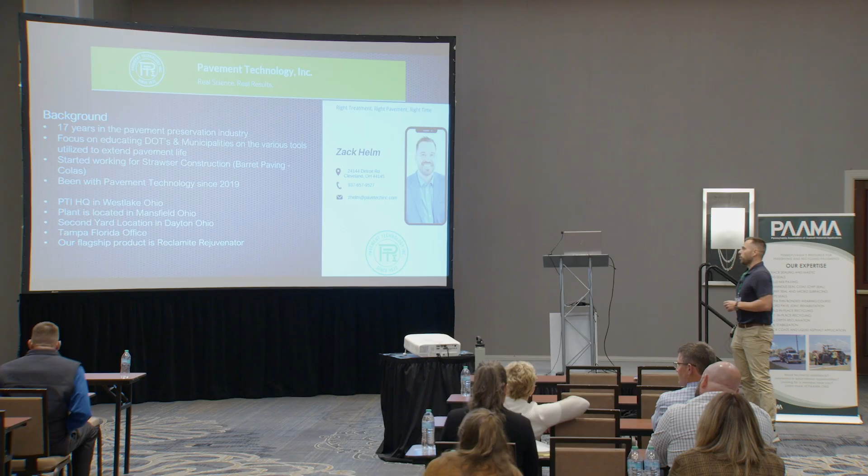Just a little bit about my background, 17 years in the pavement preservation industry. Focused a lot on DOTs, municipalities, on various tools to help extend pavement life. I used to work for Strawser Construction, a Colas company. Worked a lot in microsurfacing, cape seals, fiber mat, fog seals, you name it. Mike, actually, when I left, I said, Mike, you need to come on board, and you took my air. You were my best customer at Strawser Construction. And so Mike came on, and is an excellent person to take over the role. I've worked with Pavement Technology since 2019, where we specialize in asphalt rejuvenation.

That's all we do. A little bit of a quick story. I've been in pavement preservation - I tell people, yeah, 17 years, but really since I was 2. My dad grew up on the back of a microsurfacing machine, and he's also been with Pavement Technology for 45 years. And I can remember some stories.

I have a twin sister, and my sister and I would fight all the time, nonstop. We just didn't get along sometimes. And my dad would say, all right, son, you're going to work with me. We're going to give mom a break, and you're coming to work with me. So my dad would take me to customer visits all the time, and they'd go meet at McDonald's. They'd exchange a sandwich and a coffee, and next thing I know, they're doing a deal on Reclamite or pavement. I was like, is that all it takes? It's just a hamburger and a coffee, and then all of a sudden they're buying the product.

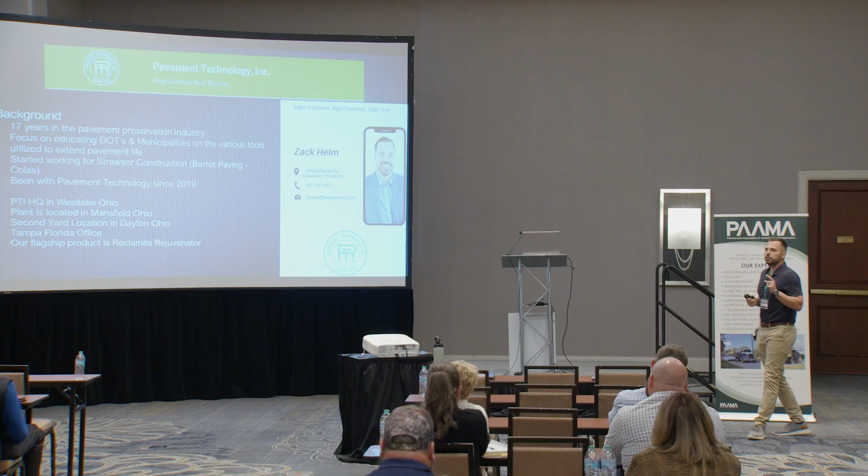Obviously, there's a relationship ahead of time. But after the meeting, he would actually take me to the roadways. And he would say, Zack, I want you to come here and look at this. He goes, we did that side, but not that side. And he'd almost put my nose in it. He'd say, what do you think about that raveling that we didn't treat? I remember telling him, I said, Dad, if you take me home right now, I'll never fight with my sister ever again. It's how much I was not a huge fan of this industry at first.

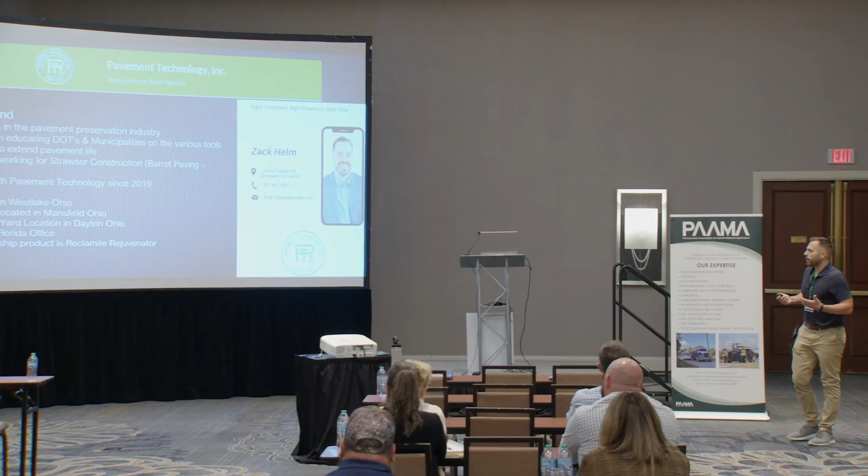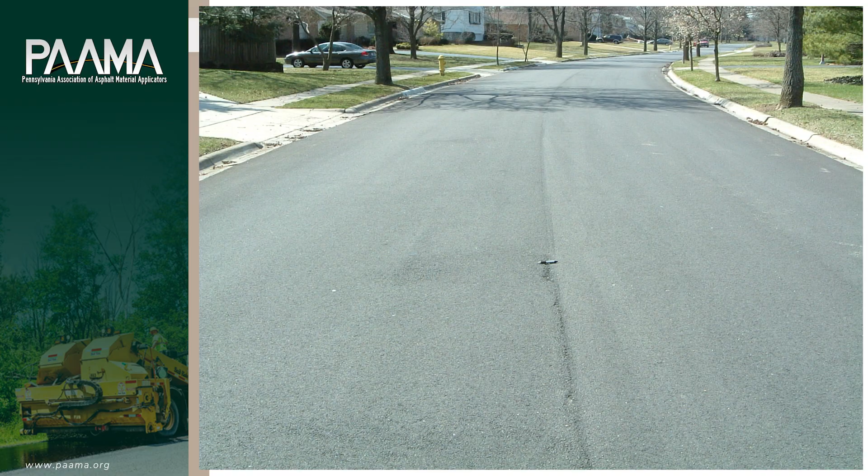But now I've grown to really love it. I'm passionate about this, so I like to talk about things when it comes to pavement preservation. And I like to talk to you guys because I'm up here and we're always giving you guys a spiel. I would like you guys to kind of speak to me a little bit. And I know this is a simple roadway, but there's no wrong answers - well, there can be, but this is pretty easy. Can you guys give me some descriptions of what you are seeing with this pavement right now? Talk to me, you don't have to raise your hand, just yell at me what you see.

Centerline joint - first thing everyone brings up, kind of opens it up, right? Keep going, anything else? Oxidation. Good, keep going. Tree cover, canopy - a lot of people don't even mention that. How old do you guys think this road is, roughly, if you had to guess?

It's a 2-year-old road, actually, Rex. Is that what you said? Oh, you said that, Mike. You've seen this presentation. That's cheap. All right, so anyways, yes, it's a newer roadway.

What I see, people a lot of times will say, this is a good road, let's not do anything to it. There's no preservation needed. We would argue there is a tool that can actually maintain this really well, and so we're going to talk about asphalt rejuvenation.

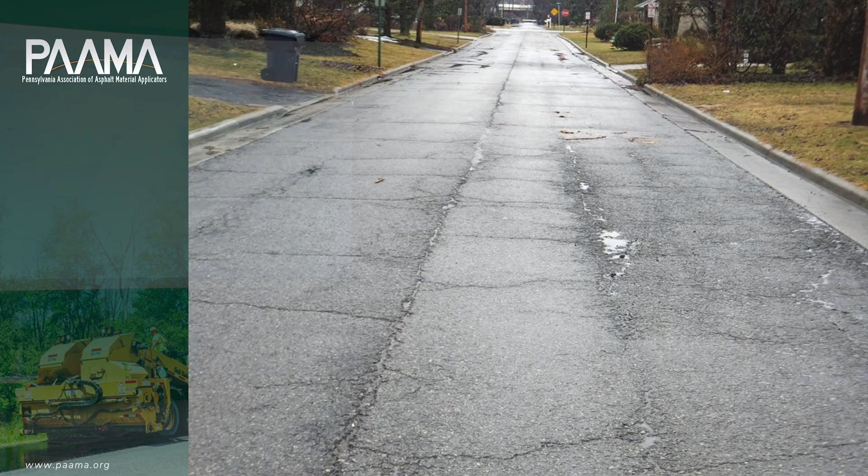Sometimes the road turns in like this, and then we say, oh crap, we need to go do something, and let's go put something on it real fast. So we see this from time to time, right? And I am a huge crack seal fan, by the way.

I think crack seal is a tremendous tool. As anything, there's a right place, right time. This is not where we want to see crack seal. This will not sell you more crack seal jobs when you do it like this, right? And so again, I'm a big fan of crack seal - it's not to make fun of the product, obviously just in the wrong application. So you'll see me a big fan of these applications.

Some of the things that we see with asphalt that's challenging from the start, and we're seeing this quite a bit - asphalt's refined more and more these days. Manufacturing at the plant's really hot. Placed down at high temperatures. The asphalt's in place at high temperatures.

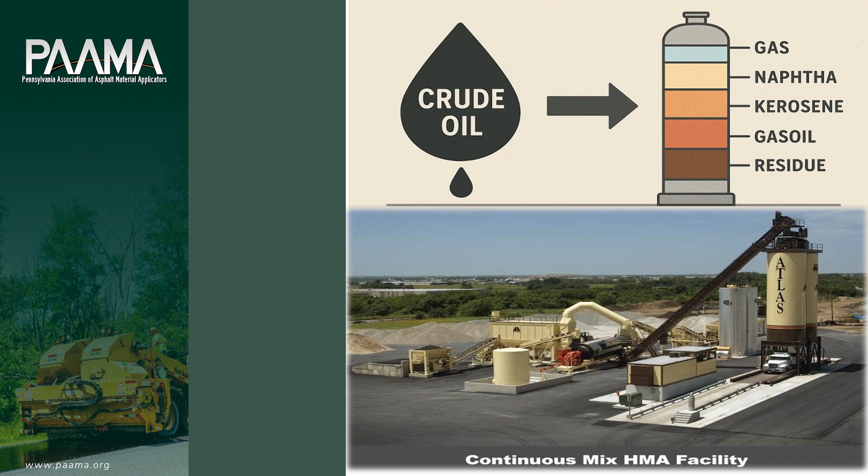And then we have the introduction of more RAP. RAP is not a bad thing - I understand we have some sustainability goals we're trying to hit. But if I were to talk to a lot of you, and I talk to road masters with your superpaves, the first thing they always tell me is, Zack, it seems like this asphalt, the good stuff, is just cooked out more. I hear that all the time. Our pavements dry out faster. They're more oxidized. They crack sooner.

I was talking to someone at Russell Standard. We had talked about that, about how it just seems like these pavements are just drying out really fast. We hear about that a lot, especially in the PA area. So that's kind of why we look at this.

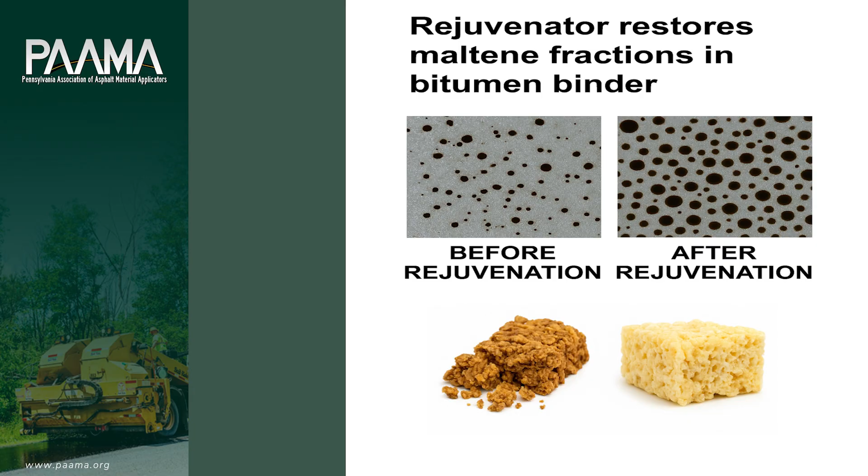And so we look a lot about rejuvenation. Rejuvenation's main goal is to restore the maltene fractions in a binder. I get a little bit nerdy here, but if you're an engineer, you might like the word maltene. Maltene is what keeps asphalt flexible and sticky. It is also the component in the asphalt that weathers. So that is the component that we want to add back into the asphalt - it's the component that's most important in a binder.

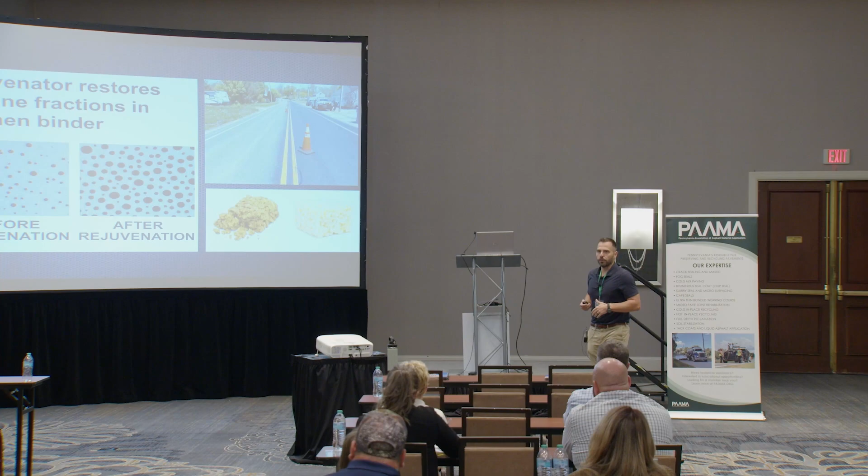When I talk to council members, we look at this like a granola bar. I have kids - when they open up a granola bar, what do you think happens? It crumbles all over the floor, right? A Rice Krispie treat, I like it because it's flexible and it bends a little bit. So when I talk to council members, we are trying to make a road more like a Rice Krispie treat and not like the hard granola bar you see on the left-hand side. This is a thing that we see quite a bit.

Pavement is flexible, it stiffens, and then it embrittles. I took this off the Transportation Research Board: beginning immediately after placement, asphalt binder undergoes oxidation, which increases the stiffness and brittleness of the binder.

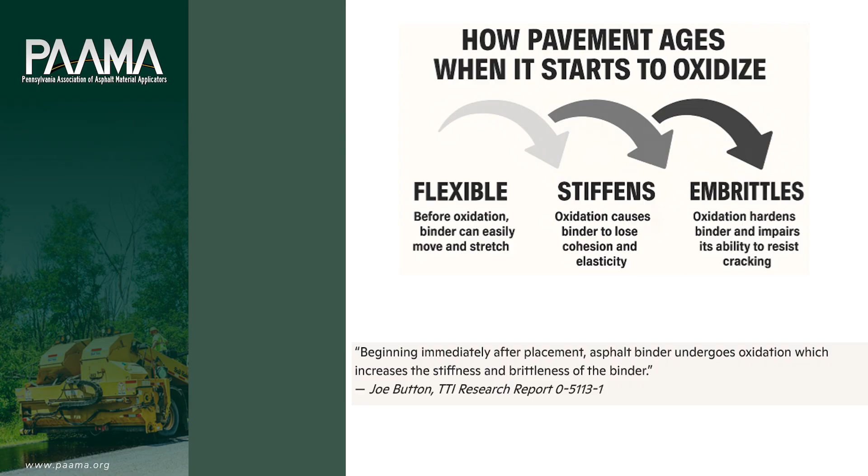So we look at rejuvenation not as something that should go on pavement at 5, 7, 8 years, where maybe a micro surface or another surface seal should go. We are actually doing rejuvenation sometimes the very next day after the asphalt's placed. Not always - we'll get into some of those case studies.

I live in Columbus, Ohio. Columbus, Ohio puts out 3 different paving projects - you'll see a line item for asphalt rejuvenation. It gets placed before the striping even goes down. It's being built into city jobs. It's about 30% of our work right now.

We'll kind of get into timing of this, but we want to show you guys where this should be used, where we do not recommend to place it, and we'll talk a little bit about the state level too, where we're seeing the state potentially utilize it as well.

This is the application going down. There are different types of rejuvenation - they're studying some of the bio-based, some vegetable-based. This is the maltene-based application right here in the Reclamite that we utilize, but there are other applications out there that NCAT is studying as well.

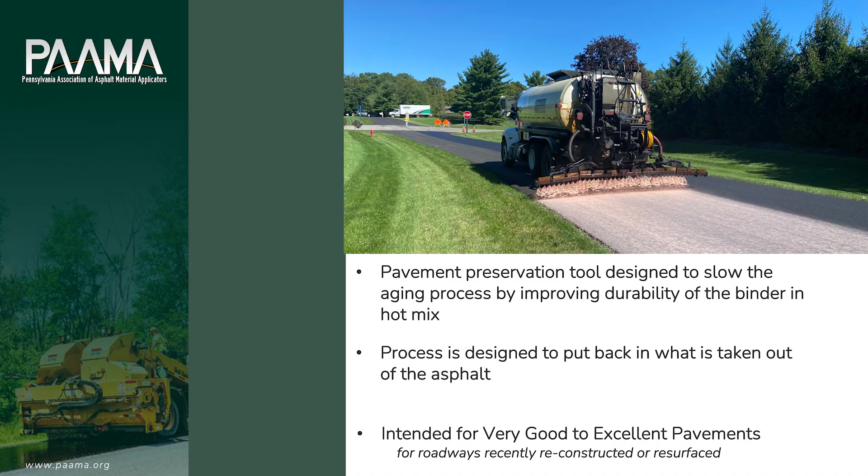And we tell people quite a bit that we like rejuvenation at 3 years or less, generally speaking, on a pavement. Some people want to push it to 5, 7 years.

We will show you that the earlier you do rejuvenation, the more benefit it can have to your asphalt. We kind of call ourselves the NCAT of rejuvenation. We have hundreds and hundreds of treated and untreated test areas throughout the Midwest and the South. We study this industry day and night. Rejuvenation is all we do, and we're very passionate about it. Suppliers come to us to evaluate their rejuvenation treatments, so we know about a lot of what's out there. We just think the earlier you put it on the pavement, the better success rate we get. So I want to show you this.

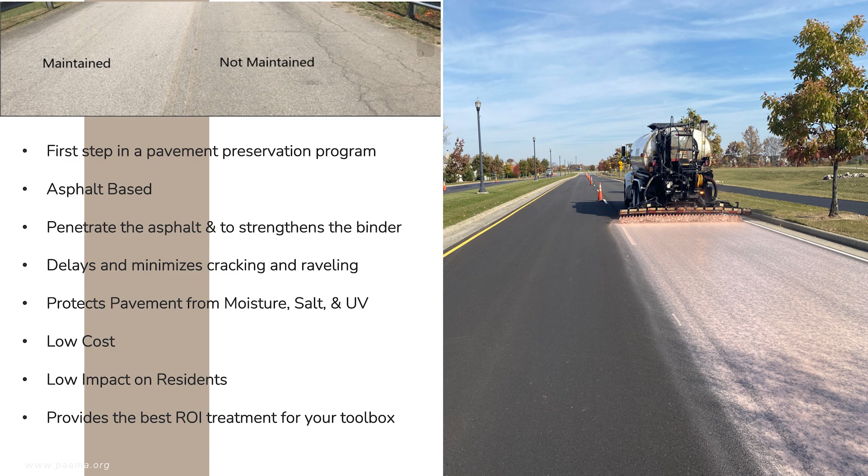It's the first step in a pavement preservation program, designed to put back what was taken out of the asphalt. There's a little confusion here - some people want to call rejuvenation a fog seal. I look at this list and see crack sealing, fog seals... I'm upset, I'm like the redheaded stepchild here, I don't have rejuvenation on here. I get it, but you guys probably meant fog seals because we fall under that category a little bit.

Fog seals are the black coatings we've been talking about on chip seals - that's how we classify a fog seal. Rejuvenation is generally different than a fog seal. This goes into the asphalt; it's not a topical treatment by any means. So you can call it a rejuvenating fog seal, but I just prefer asphalt rejuvenator, because when I say fog it gets confusing, like you're talking about those black emulsions put on chip seals or asphalt.

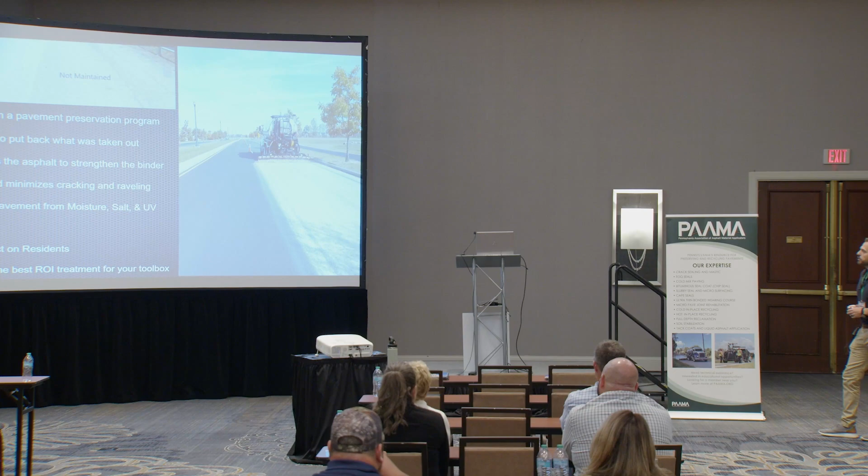So again, low cost, low impact on residents, and it provides a really good ROI treatment for your toolbox. I'm going to show you the process here.

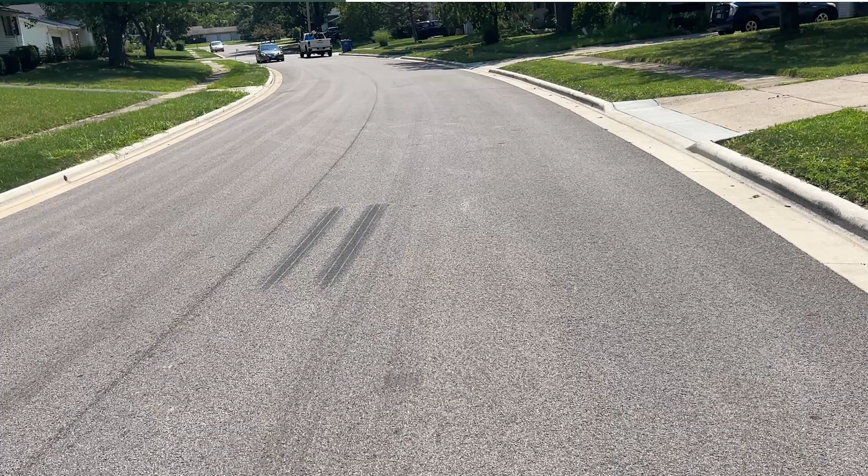Let's see if I can hit play. I just want to show you generally what the treatment looks like. This community does rejuvenation one year after the pavement has been placed - it's push button, they have a pavement management system. Every year, whatever they pave gets rejuvenated the next year. This is a 1-year-old road - look how gray and oxidized it already is. Look at the center line joint.

And this is the application going down. We have Bearcats within the company, and our rates vary - we don't just go out and shoot one rate on every pavement. We always test every roadway and lock into a rate. Generally speaking, we're at 0.05 to 0.08 gallons per square yard. This is what it looks like from an operation standpoint, and you can already see it working on the other side. Here's our second pass - notice the overlap. Why is the material overlap important? Because that center line joint always accepts more material - there's a lack of density there. So that joint always gets 2 coats of the reclamite. That's a big thing for us, making sure we get 2 coats on that center line treatment.

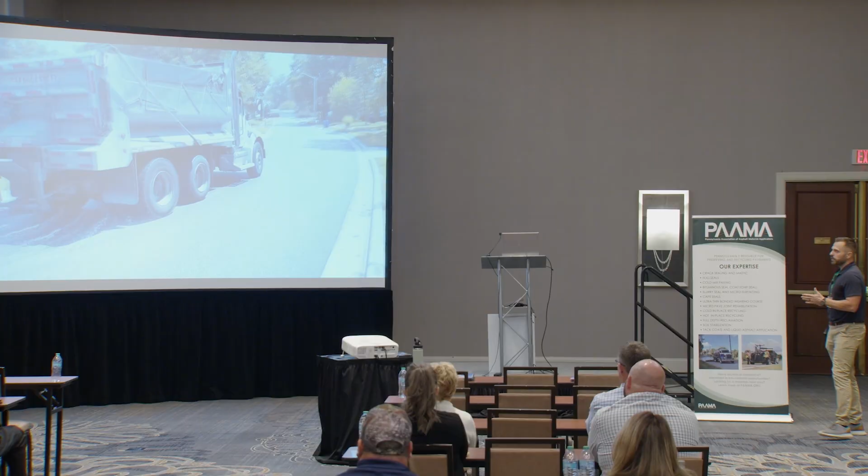This is 15 minutes later - we're seeing penetration of the material. You shouldn't see a lot of pink on top of the roadway. You don't want the material to disappear right away, because then you get a density issue. But you also don't want it sitting on top for half an hour. We want a nice 15 to 20 minute soak time, maybe 25 minutes, and then we come back and sand the pavement afterwards. It provides a little traction, soaks up the excess, and gets traffic on it very quickly. So that's just the operation.

I want to show you what the rejuvenation looks like. There's been some advertising like 'we can rejuvenate without sand, no sand needed.' We will tell you this - we think sand is important, even though we could rejuvenate roads without using sand. We think the extra insurance for safety is very important because it's temporary - we sweep it up the very next day, and it's very minimal. So we actually like the added sand; we think that's a benefit to the overall process. We've seen products say they don't need sand, and they can slick up a pavement pretty bad. You want to have that sand down - we think it's important.

24 hours after sweeping, and that's the look of the surface - darkened up.

One thing we know about the pavement preservation industry: everything looks good after 1 day, even 2 days. You always want something that looks nice the day after, and we do have that. But with rejuvenation, we really have to focus on results, and it's important to share some treated versus untreated case studies.

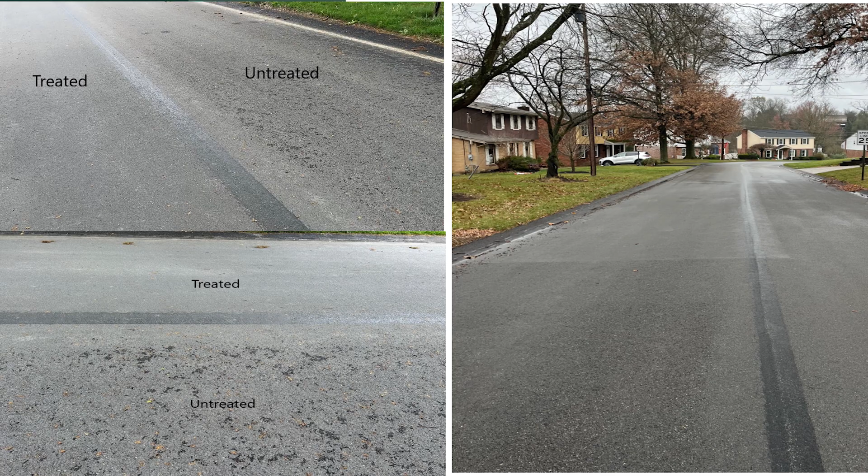This is a township in the Pittsburgh area that has a large rejuvenation program every year. They noticed a lot of the Superpave mixes seem to be drying out a lot, so we did a large program for them, treating only one side of the pavement and leaving the other side untreated on one section of roadway.

This is 4 years later. I want to show you the difference in pitting and oxidation. The top section is more pitted, and it just got done raining - notice where water is sitting in the voids. This side is completely dry and the surface is a lot tighter. After 4 years, this looks even better if you were to go check it today.

This is now almost 5 or 6 years old - a really good result, just comparing a treated and untreated area. We've taken many folks out to this pavement to show them some of the benefits it can have for your asphalt. This is a cool pavement.

We are big on testing. This is a test we did in the township - actually, Mike, this is in your backyard in Delaware County. We only did one side of the pavement - we put the tar paper down and didn't treat this side.

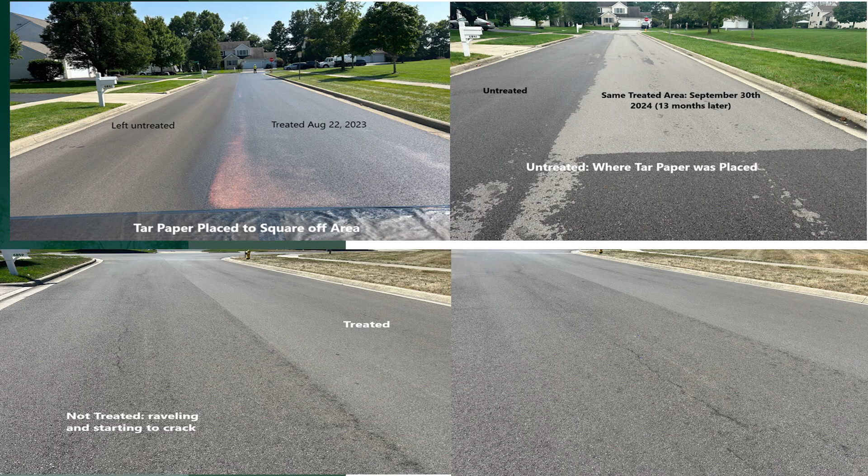We had a tremendous amount of rain last year with Hurricane Helene, and we came out when it started to dry off. Here's the treated area where we did the rejuvenation the next year - this is 13 months later, same exact roadway. One of the first things you'll notice with a rejuvenation is the ability for moisture to wick right off the roadway, which provides a tremendous seal.

I live in Ohio, and they love this application because it keeps salt out of the pavement - very beneficial when you talk about salting roadways. But if you look at the bottom photo, same roadway, look at the difference in the cracking we're starting to see, compared to over here where the roadway is so tight.

Same roadway too, on a dry day. You can really see it - that's the first thing a public works director will notice. A city engineer will say, Zach, my roads dry off a lot faster with the rejuvenation treatment. So really cool pictures to share with you to see how that's working.

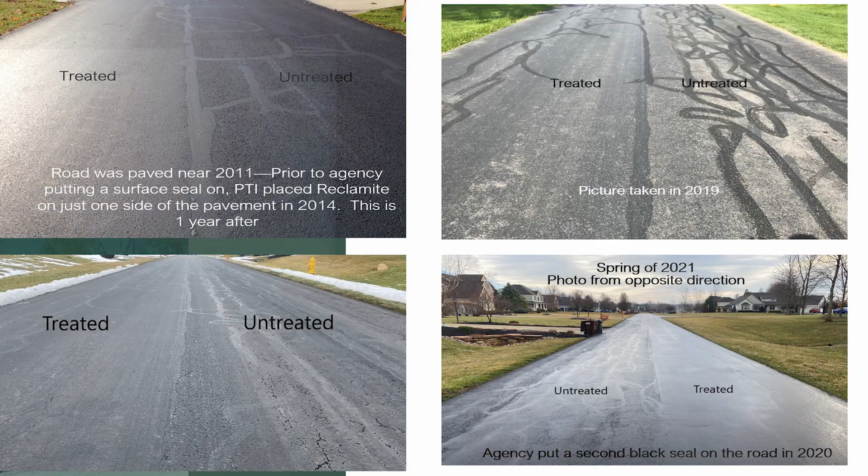This is my fog seal example I show people. I'm a huge fan of fog seals - there's GSB-88, I'm a fan of that, and there are good treatments out there. But how are we different than maybe a black seal coat? I'll show you the difference here.

This agency was going to put a black seal coat on their roads. We said, before you put the black seal coat down on this 1-year-old road, can we put a rejuvenation product on just one side first? They agreed. This is the look 1 year after - look at the difference. Then this is in 2019, after they resealed it with a black seal coat, but you can see the difference right here on the same pavement, and this is right before they paved it.

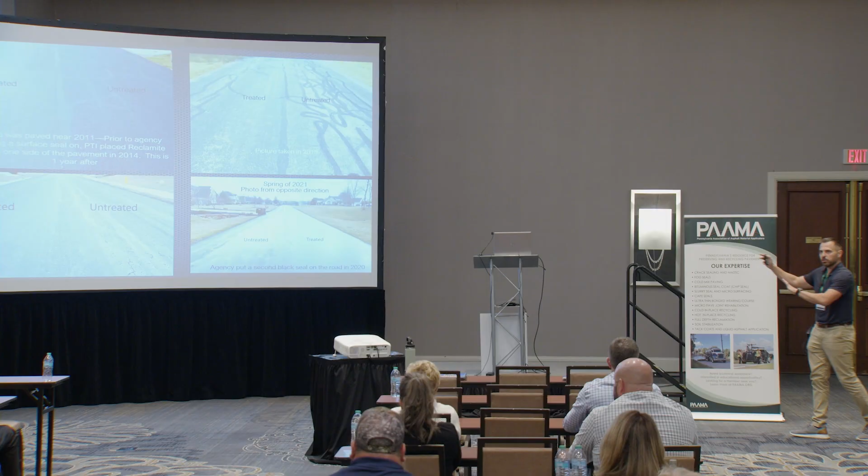This is the opposite side - the only difference is we put Reclamite on this before they ever put the seal coat down. Black seal coats are good, we recommend them and we're always promoters of that. But there's a difference when you're actually going inside the asphalt and combining with the chemistry in the binder. I wanted to share that photo because it shows the real difference between a fog seal and what a rejuvenation treatment is intended to do.

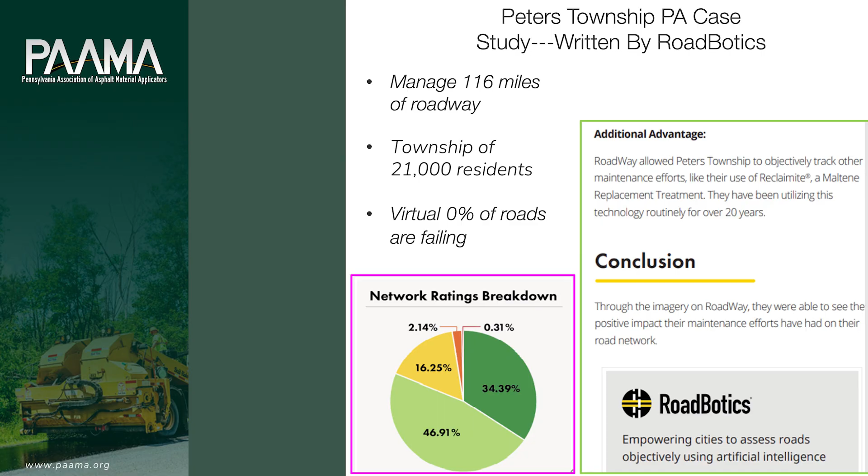You can call Peters Township. They've been using Rejuvenator longer than anyone in the state, I believe. They actually did a breakdown of their roadways. They use Rejuvenator at year one, and then they do a retreat at year three or four with it. RoadBotics did a study. They had no clue about preservation much, they just said, hey, what's this treatment you're using? We noticed your roadways are in really good shape. So RoadBotics found that, knowing they use some type of maintenance, their roadways were lasting a lot longer than the other municipalities they work for.

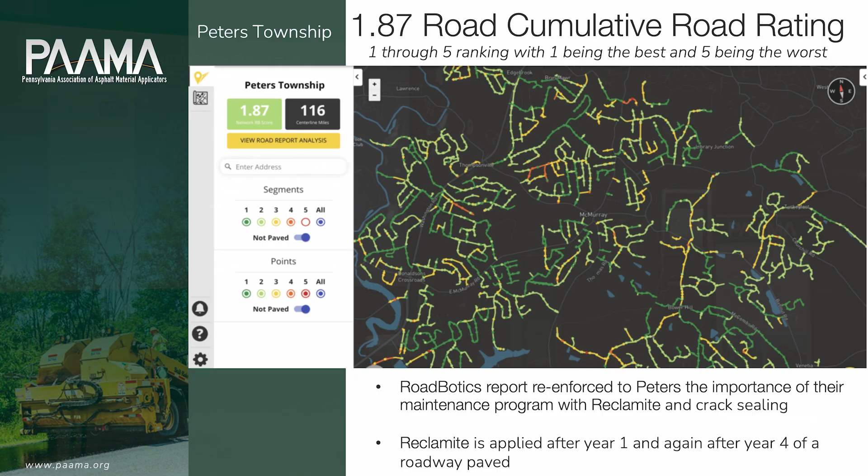So they had virtually zero roads failing in the community. Big into crack seal, Peters Township. Again, crack seal is huge. Big into rejuvenation. Two of the lowest costs, but it gets them a big bang for their dollar, is the rejuvenation and the crack seal. This is a good picture. One through five was their ranking. Their overall ranking on their system was 1.87. So one being the best, five being the worst. That was their cumulative road ranking at Peters Township. Cool case study here, wanted to share that with you guys a little bit.

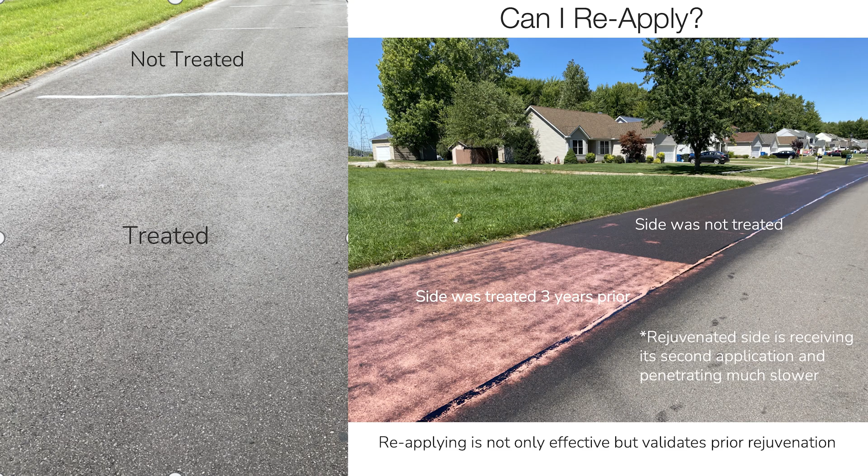Can we retreat? We can, not always. What we tell people about retreats all the time is that a retreat validates the use of your first rejuvenation treatment. What does that mean? Here's a roadway we had rejuvenated three years ago, bottom half of the photo. They had such good performance with it. As you can see, this is the treated, untreated. Look how much more open that is. They said, hey, can you come and do the rest of the road for us? And it was still a good candidate, but this is the area we rejuvenated. Look how much more of the material sits on top of the treated area. So retreats can happen, but they also validate the prior rejuvenation, which we want to show you guys.

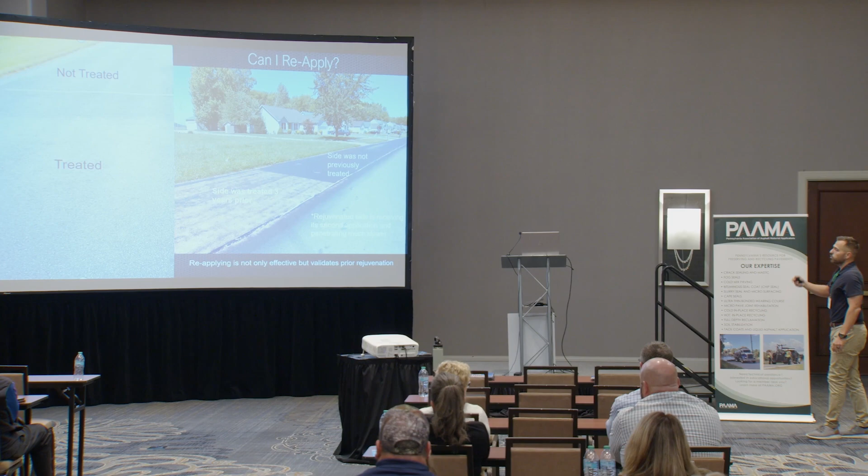So when we do a retreat for a community, we want to know if they're a retreat because we're going to have a little bit more traffic control. And they're going to have to lower our application rates a little bit more, because the tightened surface means the material stays on top a little bit longer. So you can definitely retreat. Not all cases, but there's some benefit to the agency.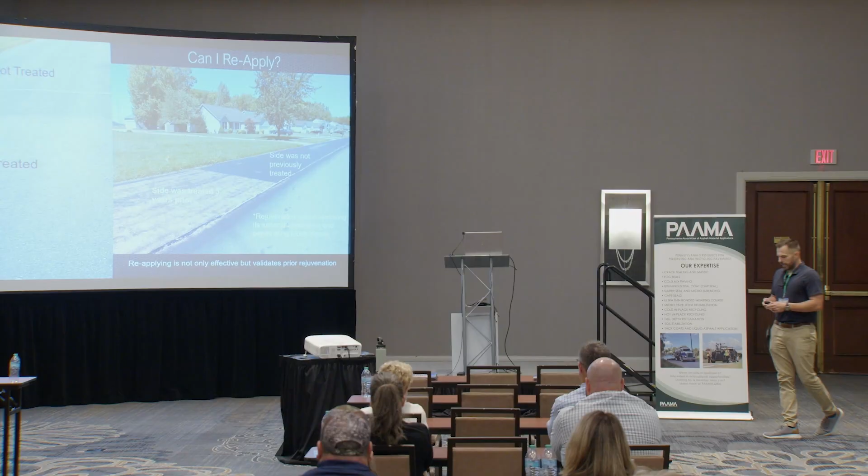Rex, how much time do I have left? Okay, I feel like I'm going fast here. Any questions so far, guys?

Yes sir, can you reuse the sand or not? Everyone asks me that. We cannot, and I wish we could, because I feel like there could be something we could do. We do not reuse the sand. That's a good question. The other day we had a person that had four inches of processed millings, and they put the four inches down. We made a brand new access road for them by just spraying the millings with Reclamite, and we can actually tighten the millings up quite a bit. I wish we could reuse our sand quite a bit.

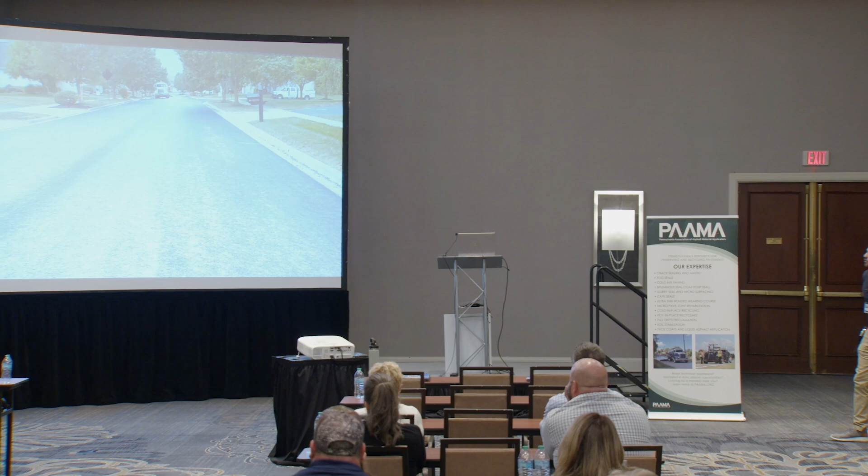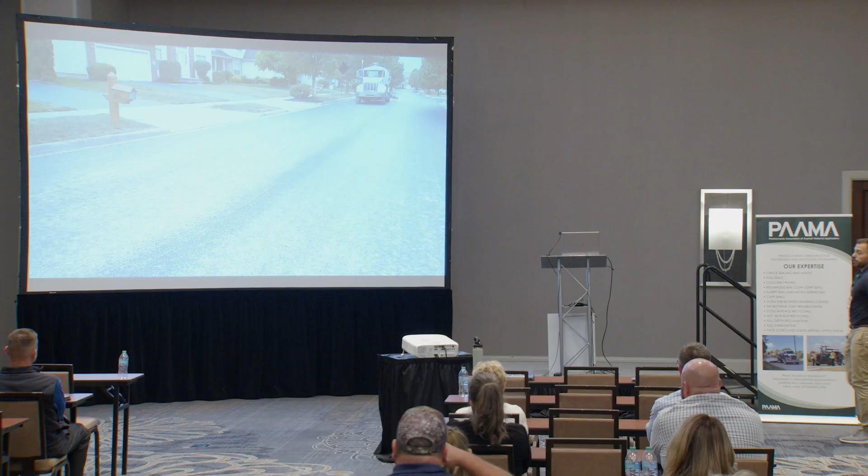That's a good question. This is a roadway, what do you guys notice about this? We already Reclamited this whole road full width. What do you notice about this road? You guys see anything in the center line there? Right, the center looks like we haven't touched it yet, right? We talk about that density issue, that just guzzled in all of the material. So we actually came back and shot a two-foot bar on this. This is getting its third application on this road, because remember, we always overlap. And it just shows you the center line, why we have so many issues in our center line.

In Ohio, they're really looking at that center line problem. That just shows you the density we can have, just even in residential areas, quite a bit. This is Sawmill Road out of Columbus. Superpave pavement, Mike Metzger, correct? This is your road you guys built at Delaware County.

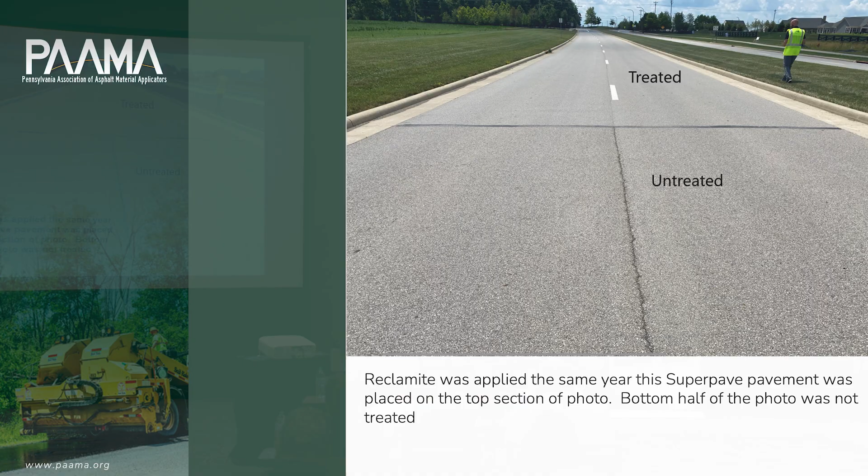At the top section, we built in the rejuvenation treatment right after it was paved. And the bottom section, we did not. We'll kind of get into the PCI scores here, but this crack seal joint kind of fooled the punch list guys, they thought this was a paving joint, and so they put a crack seal right across it. That's actually where our test just stopped. But notice the difference in the centerline pavement, and that is why we do a lot of overlapping with the material. It has a great effect on the center line if you get to it early enough on the pavement itself.

I actually had James Golden, believe it or not, he lives, James, you live what, 30 minutes from me? So I'm like, I know a guy who does PCI rankings. I had James go out there. 95 was the treated area, 85 was the untreated. So we were validating the pavement performance just on the PCI of the pavement. And James, you can talk about the center line a little bit with me.

Your deduct was a lot more on the center line, correct?

Yeah, this is actually an interesting case that went around everybody. This is a client of ours as well for pavement management.

After they did this project, about a year later, I got a call from the city engineer that said, hey, something's wrong with these ratings. I said, well, what's going on? They said, well, these roads show that they're green and they're supposed to be blue. If you remember my slide, green is good and blue is excellent. We sank a lot of money into this project.

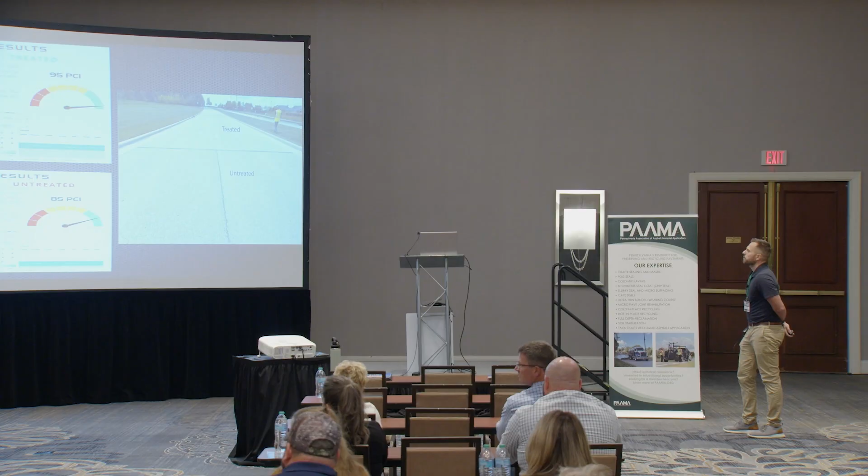I said, hey, hop on the road insights platform, take a look at the video with me. What do you see? Right away, he said, oh my God, the joints are wide open, right? So when you're looking at ASTM distresses and cracks, this is wide open. It's around 2... you probably put about a pencil in there, right?

These are some other local agencies where we've done the rejuvenation and why the overlap is important. I keep showing that. These are actual joints, treated and untreated areas. Real cities you can come out and visit. Again, we always put test samples down. You'll see at the end of my slide, it's very important because, guys, we take it with a badge of honor.

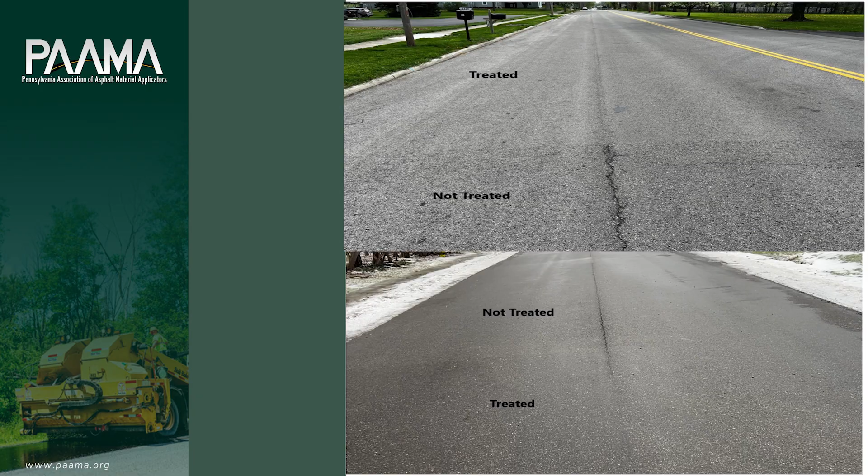What do you think people used to call rejuvenators back in the day? Snake oil. We take it with a badge of honor. We say, hey, come on out, let's show you. We are seeing a lot of interest in rejuvenation, a lot of growth, and it's because of these tests. It's really test and validate, right? And it's really important we put these down. So these are some really good areas that we've got here.

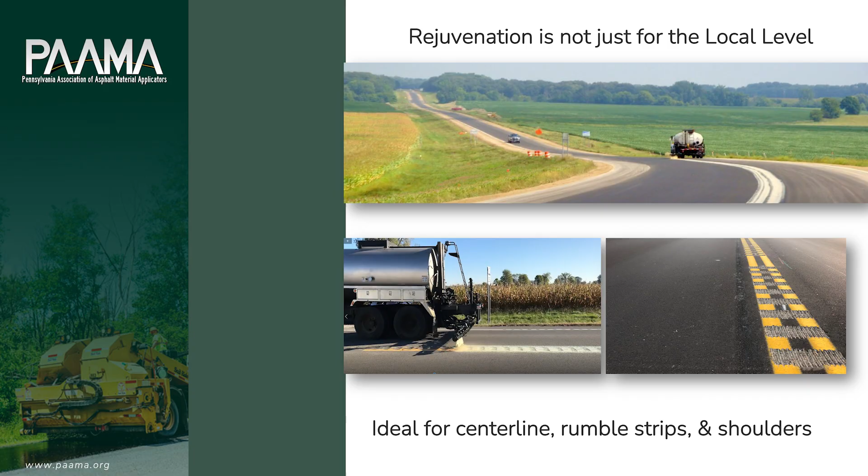Rejuvenation is not just meant for the local level. Again, we are municipal heavy quite a bit. I actually cover the city of Nashville, Tennessee. They're very big proponents of rejuvenation. TDOT does this application on their centerline joints. ODOT is doing some of this on their centerline joints too. Rumble strips are a big deal right now. I don't know about Pennsylvania as much, but in Ohio, they're putting a rumble strip on all 2-lane roadways right now. Every shoulder is getting a rumble strip. And this is a great application for rejuvenation just along the rumble strip area, the shoulders, centerline treatments.

You have opportunities at the state level. This is actually the Ohio Turnpike. Just shows you we're just going 2 foot wide, sometimes 3 foot wide, depending upon what the spec says. And we're spraying this down on brand new asphalt. The Turnpike at Ohio, they build this into every job before the striping goes down, generally speaking. Now, they'll have some temp here, but this is having really good success on that centerline joint, and it's very inexpensive to utilize. It's, like one engineer said, it's immaterial to the total of the job, but very effective.

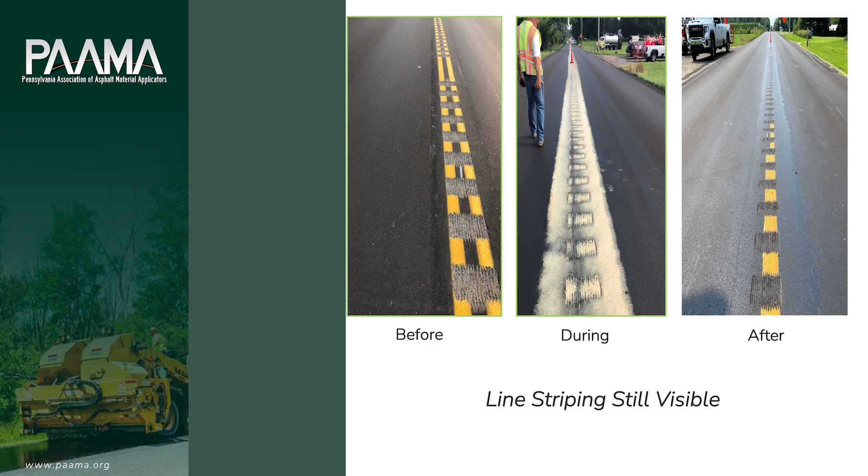This is actually a look here at a district. Here's before. They actually put the striping down before we got there. The during and after. You'll notice we do not obliterate the stripe. There is some debate if it does hurt some of the reflectivity, but you will notice we do not obliterate the stripe. You can go right on top of it. We do probably recommend doing it before the striping goes down if you can, but it does not take out the stripe often.

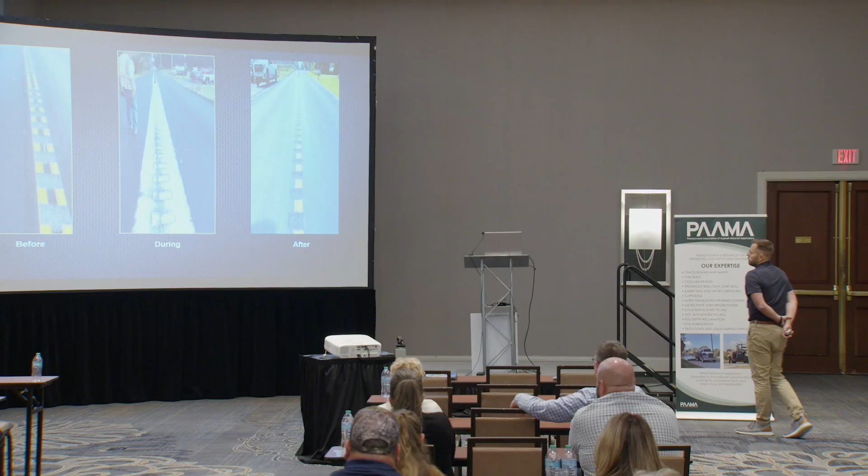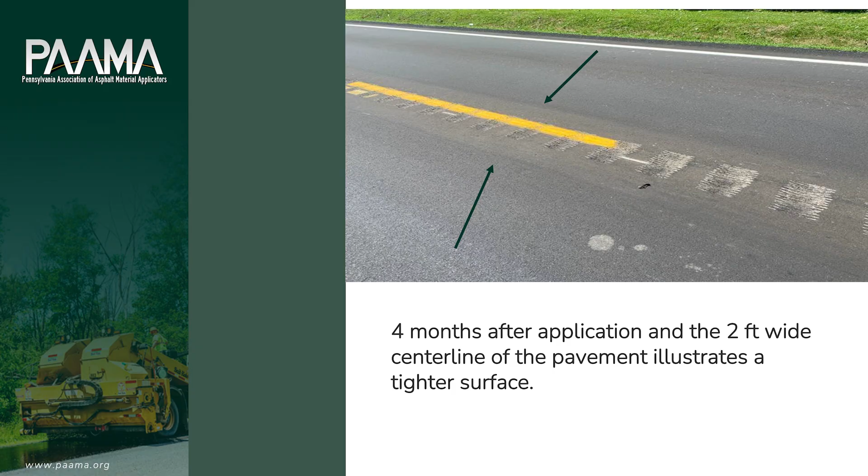Here's a difference 4 months later. The engineer out here at this district noticed an immediate tightening on the centerline joint. It might be hard to see from the photo, but you can see where exactly our 2-foot spray bar was in that area. So really good performance there. Again, rumble strips, shoulders, centerline, really good look at applications in the state.

It's Kentucky. Kentucky did this on their shoulders in 2013. We uncovered this test section in 2019. And look at the difference with the cracking there on the shoulder length. It works very well. There's actually really good treatments.

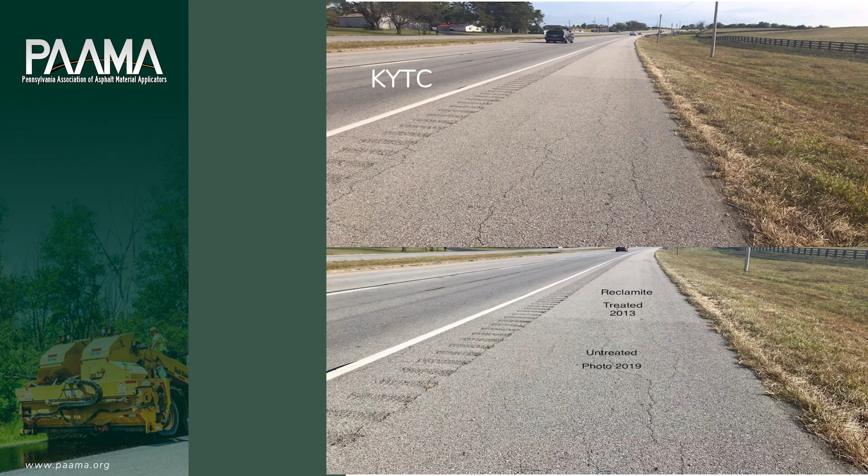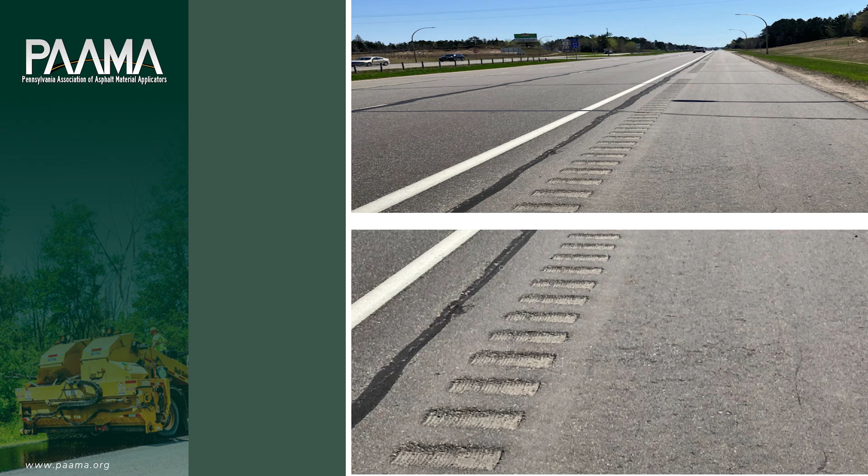When your treatments become a little bit older in the pavement, you can put fog seals on the shoulders. I think that's great. You can microsurface the shoulders. Mike and Strawser, you've done that. We like Reclamite too, right away, build it into the job because it can't get plowed off. This goes into the asphalt, so this will not get plowed off. And that happens in cold weather climates sometimes. I believe this is Minnesota DOT. We just did the 2-foot wide rumble strip, and notice we didn't do the rest of the shoulder.

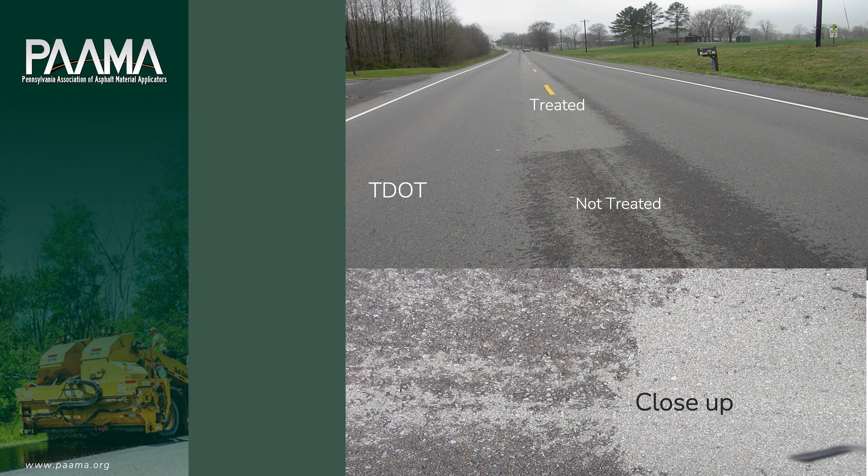Look at the difference in cracking in the area we did not treat. It can have a really good effect on the rumble strip area as well. This is TDOT, which has some specifications they utilize. We talked about the moisture - that's the first thing you notice on the treated and untreated area. That's what we really like to see.

Where's Ken? Is Ken Messina in here at all? I can't find him. We were talking about this - he said the hard part about this is you just can't see it. It works really well, but you just don't see it. You can see it on a rainy day when it dries up - you can definitely see the benefit of it. So we were having that discussion sometimes. These applications can be difficult because you're not seeing something black on top or something like that.

That's about it. My final thoughts are rejuvenation is more than just viscosity change. I see a lot of people will rejuvenate one side and not the other, core the pavement, and say look, we softened the binder. We have to be careful with that.

Does anyone know what I can put on asphalt to soften it that would not be good? Diesel - who said fuel? A gas. It is really important that we look to see what is in our rejuvenation.

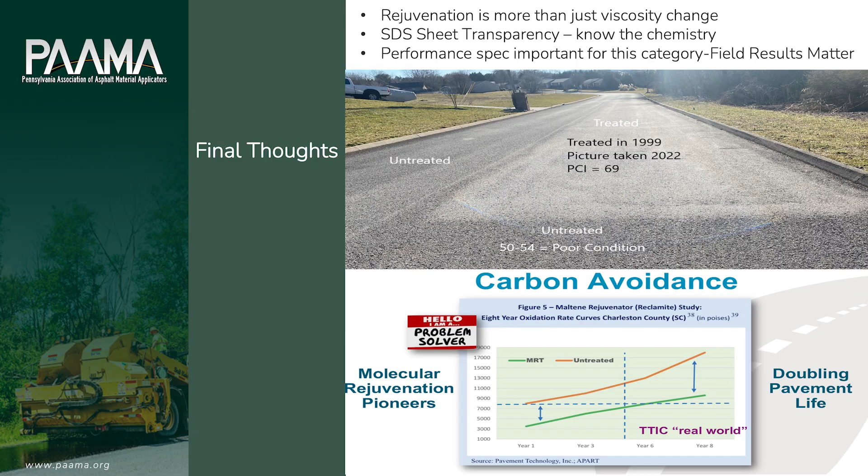So we are big believers in SDS sheet transparency - know the chemistry. If someone has a rejuvenation treatment, how are you softening the asphalt? We do not want to have any solvents in there. It's really important to look into that.

So if you have a supplier that comes to you and says, hey, we want you, a contractor, to put down a rejuvenator, you've got to hold them accountable. What is in your product? Show me a bunch of results where you've got treated versus untreated. It's really important because we will get called snake oils in this industry if we just put all these products down that say they are, but we don't have that field performance.

So really important with that. We think performance spec is very important - show where you've done the work and you actually have life extension. We think performance in the rejuvenation category is a lot different than a micro surfacing. You guys have statewide specs for micro. Rejuvenation is very high level because that can mean a lot of different things. So we think performance specs are really important when it comes to that process.

Your best test track is your state. We love NCAT, we love Minnesota DOT - we think NCAT is great. We will tell you, though, in Ohio we have some different pavements than NCAT, and so we always tell people, if you really want to test a product, the best thing you can do is put this down in your backyard and then watch it over time.

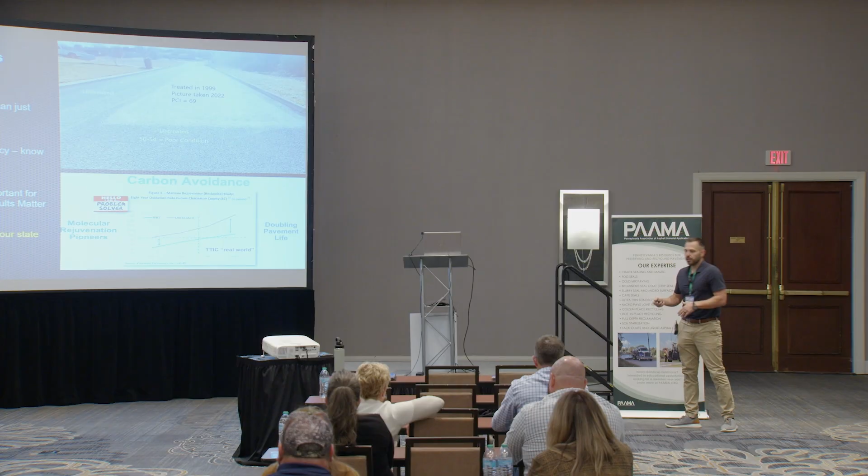There's nothing better than a field visit. I know we've got analytics, and we can do all kinds of lasers, put the eyes on the pavement - it's one of the best things. It's old school, I know it is, but I know some of you guys are old school here. It's the best way we can actually look at performance - eyes on the pavement itself. And then that's about it.

These are some other tests that we have all throughout the state - again, treated and untreated areas. But yeah, that's kind of it that I have for you guys. Any questions for me at all, guys?

Questions? Mike, how about the tackiness - does it stay tacky for a while? It does, good question. We will lay down the product, and one thing we notice, especially in cooler temperatures, is it stays tacky for a few days. That's a good sign. You do not want a pavement that is not tacky after rejuvenation. People always ask, is the skid bad the next day? We sweep up the sand, it's actually tacky - we don't have a skid problem at all. So it does stay tacky for a few days.

So absolutely - a little bit. You can walk on it and kind of hear a little bit of a sound, but after about 4 or 5 days, you don't notice it at all. It goes away, it's not permanent by any means. And actually, as a rep, I do want to see that. If it's dry, it won't have that sound to it. So, good question. Yes, sir.

You fog or micro with it - how long are you waiting? I'm sorry, when you fog or micro with reclamite, how long are you waiting? When I put the reclamite down, how long before traffic gets on? No, between putting the micro on top of reclamite. You mentioned fog everywhere, you mentioned a fog. Oh, I guess I'm explaining.

When do you want to put another process on top of reclamite? You can do it the next year if you want to. There's no issue with reclamite having bonding issues. If you were to put a fog or a micro on top, I would hope we'd delay the need for another treatment. But let's say the agency is very proactive and wants a micro next year—you can go ahead and do that. No issues at all.